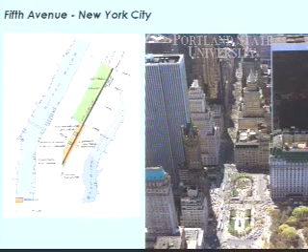Starting from the top, this sector of 5th Avenue in New York, from Central Park down to Union Square, runs through the heart of Manhattan's high-intensity retail district. One thing we found that stuck out strongly is that there's a merchants association that is incredibly powerful, with a say in everything that happens on that street, from light fixtures to furnishings to sweeping and maintenance.

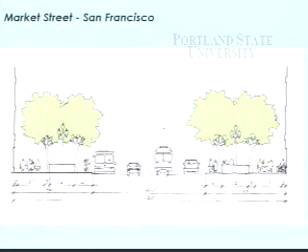San Francisco's Market Street has always been one of the more memorable streets, cutting right across the grid and ending at the Ferry Building. It's the most intensive transit street in San Francisco, with an incredible mix of modes on the surface and two layers of transit below the street. It's had its high points and low points over the last half century. We think of our 80-foot right-of-ways as reasonably good-sized, but this street is 120 feet wide, with a lot going on and incredibly wide sidewalks.

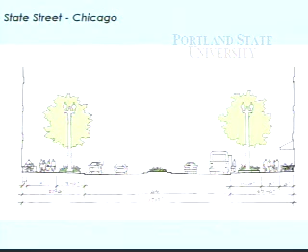State Street in Chicago was at one time called the greatest retail street in America. It had 9 department stores at one time, its own custom light fixtures, and has been the scene of great parades and homecomings throughout Chicago's history, right in the heart of the Loop. It really went downhill in the 1980s and 1990s, and was reinvented in the last 10 years, so it's on its way back. Again, an enormous scale street, although in Chicago, 120 feet of street width feels about right because the buildings are so tall, so there's a relationship there.

Nicollet Mall in Minneapolis was actually one of the first modern-era bus transit malls, done in the late 60s by the same team that designed our mall, Lawrence Halprin. It started with great fanfare, but within about 10 or 15 years there were all kinds of detailing and maintenance problems, and it got largely revamped in the mid-1980s.

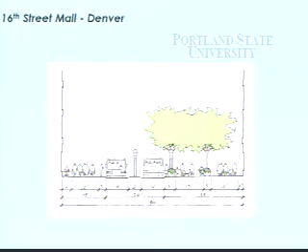Denver's 16th Street Mall was done in about 1980. This was Denver's prime retail street, the heart of the city, and they reconceived it as a transit and pedestrian corridor in the 1980s. This is probably the closest street out of this group built with the kind of craftsmanship that the Portland Mall has, with a lot of detail down to furnishings, paving, and custom lights. Denver's a little more in our scale - most of their right-of-ways are about 80 feet, but this is an unusual one. There are really no other vehicles besides these hybrid-powered shuttle vehicles that run up and down the length of it, so it's very pedestrian-oriented.

And then our mall, built in 1978 and then extended in 1994 all the way to Union Station.

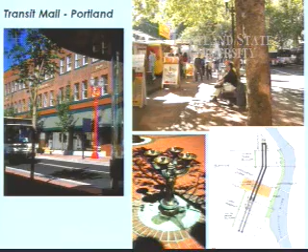Just briefly, the lessons learned out of this exercise - these are my boss Greg Baldwin's words, and I'll try to make them understandable. You want these great streets to reveal what's going on and the qualities of them, meaning the life of the city spills out onto these great streets. It's not behind blank walls and hidden away. The truly great streets need to have a level of finish and treatment that's of a higher quality than the other streets in the city, so it stands out in your memory as a very special place.

And the third point: require proper behavior of all activities. That would mean a simple thing like, would you put your service docks and loading docks right out on the front of a great street? Probably not. You would try to take care of that on another street frontage or below grade.

Accommodating all modes without compromise was a real challenge for us on the Portland Transit Mall—the great mixture of light rail, buses, bikes, autos, and pedestrians. You have to plan for those so that one doesn't dominate the other.

The biggest lesson, and maybe the biggest criticism of the Portland Mall, is that it was built at a time with a lot more federal funding than is available today, and it was in a way imposed on the city, without the kind of dialogue, interaction, support, and outreach to the businesses that front it. There were groups of businesses that never embraced the idea of the mall, and when there were problems, you'd often hear, 'well, it's TriMet Street, it's Portland Street, it's not my street.'

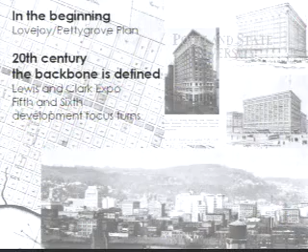In this earlier photograph, you can already see the highest buildings beginning to define 5th and 6th Avenue as the heart of our city. So they were the primary streets from the beginning.

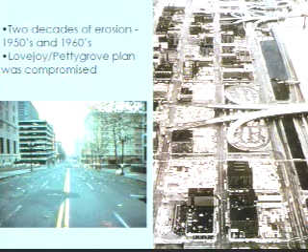But in the 50s, after the post-war flight to the suburbs with different commercial and retailing models—Lloyd Center on the east side and eventually Washington Square out west—we saw a decline of interest in downtown, and the removal of historic buildings as well as buildings that had lost care from their owners. The picture on the right shows the acres of parking that emerged downtown, compromising that original idea of the heart of the city through actions by other retail and commercial interests.

So in '72, under Neil Goldschmidt as mayor, with a whole host of other people getting involved, the downtown plan reestablished the principal characteristics for the city moving forward—reestablishing primary access north and south along 5th and 6th Avenue, with secondary access on Yamhill and Morrison Streets.

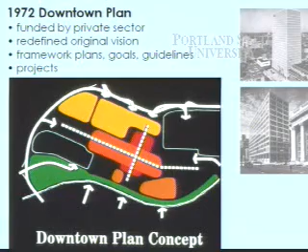And Brian will point out that right on the edge of that orange spot is also Market Street, which will come back into our conversation as we developed our design.

But the transit mall, from its early inception, really embodied quite a few of those important 'great street' characteristics. For Portland, establishing a civic design standard was paramount in terms of the level of finish and the kind of activity that would happen along the mall.

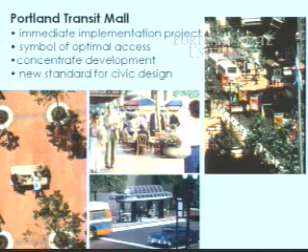By concentrating transit activities along 5th and 6th Avenue, it helped establish in people's minds the primacy of 5th and 6th as a place both for activity and transit to occur, but also for other development to occur—and you'll see that playing out in subsequent efforts.

When the Banfield Light Rail came in the 80s and reestablished the primacy of Morrison and Yamhill as cross-connecting streets, Pioneer Square as a development of place in the heart of downtown really helped manifest that. The development of the sidewalks, street furniture, and finishings along Morrison and Yamhill were very intentionally done, carrying through that palette of materials to reestablish not just literal interpretations, but the whole feeling through downtown.

One of the things you'll see as Bob describes these different transit corridor studies and projects over this 25 years is that the mall kept being revisited as a potential corridor to add rail transit of some kind. Each step of the way, there was an effort asking, should the mall be our next rail corridor? I think there was a pattern there that we knew eventually that was going to be the thing, but there were other projects to build before we got there.

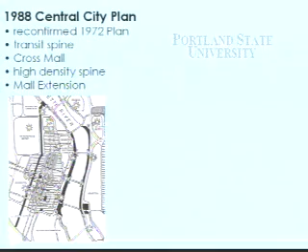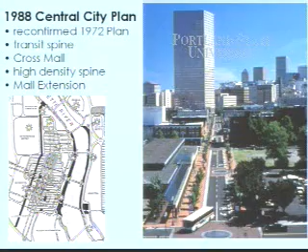This phrase about building community really became a kind of civic aspect of Portland in particular, the inclusion of a broader community in that dialogue, seeking out other voices and other ideas as that conversation was happening. It wasn't going to be just a guarded planning and design effort visited by a very few and then presented to the leadership and decision makers. So it's a much more populist kind of conversation.

As that continued through any other expansions of the mall, with the extension north out to Union Station, every move along the way was really scrutinized and talked about to a very high level, and the materials used and the places they were done weren't presupposed or prejudged at every step of the way. That's been talked about.

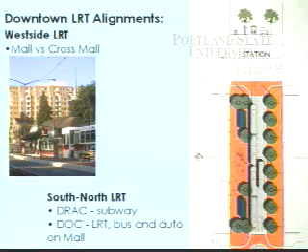In the further study that Brian was alluding to, when we got to the West Side project, bringing Gresham into downtown Portland and then taking Portland out to Washington County, that transference of the look and feel of the materials being used, even as it crossed into the Tualatin Valley and out to Washington County, is amazing to hear as we're involved in the design process.

People wanted it to have the quality of what the downtown mall's about. At the same time, they're saying, yeah, but I don't want it to look like Portland, I don't want Portland out in my area. So there's that betwixt and between of what are you doing that's specific to the place, but also allows a kind of individual district or character interpretation to come through. You'll see that again as we get further into this analysis.

The other point Brian's alluding to, in looking at this extension of transit into larger regional connectivity, the subway was studied quite a bit, wondering if we were to allow that higher speed and higher capacity movement through downtown, where would that go and how would it link into the surface, much like other cities have done around the country. But we kept coming back to the cost being extraordinary to build that, and the levels of people using that system -- it's a trade-off of how much you're paying for versus how much ridership you're really going to provide.

Without going into all the permutations that were looked at in the South-North study, it kept coming back to the fact that surface light rail transportation does allow flexibility and choice, and more fine-tuning and fine-grain positioning of where stops would go and how they'd interact with the neighborhood.

On Interstate Max, which kind of grew out of the ashes of when South North, as a $1 billion-plus regional transit initiative, did not pass, either in Vancouver, Washington, or in other parts of the city, it allowed that conversation of transit and growth and planning to still continue.

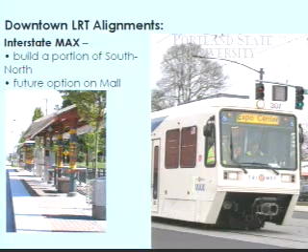Its relationship to the transit mall is we decided let's get our foot in the door on our eventual full north-south alignment, because ultimately this wants to go through the middle of downtown on another set of streets besides Morrison, Yamhill, and First, since we'll run out of capacity to run trains through our 200-foot block. So this was taking that tiptoe, or maybe even a bigger step, towards ultimately setting us up so we could put trains on the mall.

There were some parallel efforts going on around this time, all during the 90s, because South North was looming on the horizon as the big project that would come through and upgrade the mall with light rail service. There was maintenance needed on the mall, and the conversation became, well, we'll fix it when we do South North. That became a repetitive mantra, pushing out deferred maintenance farther and farther. At one point in 1994, we didn't know how long it would be before the next major transit project.

So PDOT, with the city, initiated an effort to just fix the mall right now, repairing it in its current design state. We went through an exhaustive study, documenting every broken brick, damaged bench, and chipped paint, and put together some estimates. But by the time that effort came to fruition, we were close enough to South North that everybody decided let's table it for a minute, because we'll come back and do that when we do the big rail project.

By the time 2000 came along and we weren't going to do South North, downtown leaders, the Association for Portland Progress, brought in the Project for Public Spaces, Fred Kent, and asked what could be done to bring things back. There were changes in the banking industry leaving vacant storefronts, and shifts in the retail industry. They wanted to bring back the vitality of the mall while the conversation about future transit corridors was going on. So those efforts were happening concurrently.

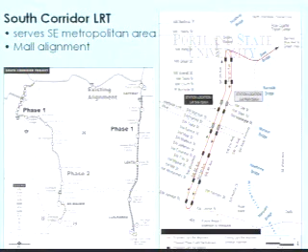There was a conscious effort here this time around by the agency leaders and planners that when we build this next corridor, we are going to get the downtown piece built. There's no way we can go off and build this and not add that transit capacity, nor can we defer all the work needed on the mall because of repairs. So the decision was made: we're going to at least get through most of downtown and finally get that north-south pair of tracks established and set up for the future.

You want to just talk about the process?

In this wide process of everybody coming to the table, TriMet is kind of the host that's providing, but everybody has to bring a covered dish or a salad or some other part of the meal.

It was a multi-agency effort, really an incredible amount of cooks in the kitchen. We had major citizens advisory committees made up of business leaders, citizens at large, and downtown residents. We conducted numerous workshops and open houses—unlike anything TriMet had done before—the outreach effort on this one was tremendous, to really let the community join and follow along and influence this design process.

One anecdotal point: when we originally started thinking about the mall transit project, it was just about the mall. We thought we'd fix some things and add light rail, doing it like we did with streetcar—this precise cutting in that wouldn't disturb anything, just laying it in. But through conversations with folks, we found the city had evolved, the citizenry had evolved and changed, and the expectations and needs had changed a lot from that earlier thinking about the project.

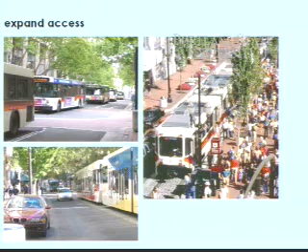And when the traffic engineers play that out, it doesn't all of a sudden open the floodgates to thousands and thousands of vehicle units, because it's regulated by cars that are stopping to turn, by the fact that it's a single lane, by the fact that transit has priority with the signals. There's a lot of other things that inherently calm that traffic down, but it was a major effort on their part to let us have some continuity there for looping around the block, for service deliveries and things like that.

And as it played out with our friends from the other modes, I think our bicycle advocates came in and said, fine, we like the continuity too. Let's make it a multimodal lane where they can ride freely on there. So that's kind of how that went.

The mall, though, again, as an act of community participation, of thinking about the materials and the actions that would happen along these great streets, it kind of elevated, I think, Portlanders' understanding and expectations for what urban design should do. Not what it could do, but what it really should do. And as folks have been involved with the design process, it's quite frankly pushed us to try and do more in looking at what this project was going to be about.

And so some of the elements that were in the original project, the benches, the brick crosswalks with the granite circles, we understood that those aren't just sort of precious artifacts that are kept around for historic thought. They're actually a part of how we understand the public space that we're moving through and how we appreciate what's going on in front of us.

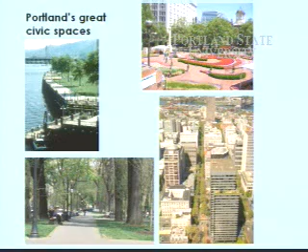So as a city is emerging and growing in the public spaces that we all share and use, Portlanders use them. They expect and demand a lot of activity, be it the Waterfront Park or Pioneer Courthouse Square, or even up in the park blocks. And so this recognition that the mall, yes, it's highly valued and highly participated with, but it's also going to be, it has to have a sense of refinement, it has to have a sense of quality that can withstand all that hard love and attention that it's going to get.

It's not precious. So we're about midway in concept design, and at this point, the city brought on a new director of urban design, Arun Jain. I think you might have met him. Really talented guy coming to us from the Bay Area, who had the benefit of coming into Portland and looking at it fresh and didn't have all the 30 years of baggage that all the rest of us have.

He and his associates embarked on about a 6-month study of the mall, looking at it in the bigger context of the central city and where things are going. When the mall was done, we didn't have thousands of people living in the Pearl District or the West Side, so the nature of downtown was really evolving into a bigger downtown. He advocated for taking a look at it in that bigger context, and this is a quick summary of some of their findings.

The level of activity up and down the mall from one end to another really varies. There are parts that are dead, parts that are very lively, parts incredibly developed to high density, and parts with one-story buildings that will probably have much larger buildings at some time. As downtown has grown, there are a lot of important connections from the mall to the east and west that maybe weren't there before.

If you look at downtown, there are subtle, and maybe not so subtle, shifts in character as you move through. For instance, the University District is an emerging thing on the mall—more established over on the park blocks, but with new buildings reaching east, it's beginning to establish its presence here. There's a very definite character district around City Hall, the government buildings, and the Chapman-Lownsdale block. There's the retail core in and around Pioneer Square, and a banking, financial, and hotel area at the north end of the central area.

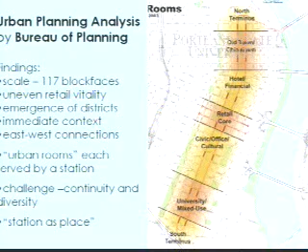So we began to look at where you would put stations within each of these districts and what the potential is. Obviously, in the middle of downtown it's pretty well built out—there aren't a lot of open opportunities. But up at the north end, with the post office and the UNR blocks, there's potential for significant development around stations there. So this began to give us a framework.

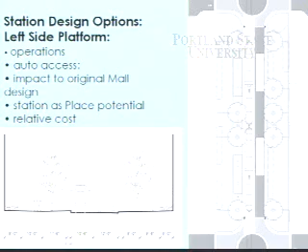If you're running the track in the middle of the street so buses can still use the right-hand lane, the curb is already out there on those wide sidewalks, so that became a natural choice. We're still thinking we've got to afford this project and can't rebuild the street from wall to wall, so that became an obvious choice. But it doesn't allow auto continuity or bike continuity through there, so it had that drawback. But if you did that, what would it look like? Here's the middle of the mall, and here's where those wide sidewalk blocks would occur.

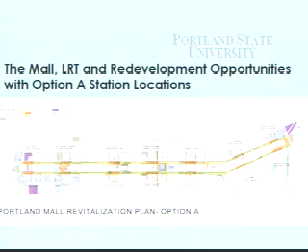At the north end and the south end, the stations stay consistent between the alternatives.

We went through quite a bit of struggle, with many different configurations considered, wide options, driving on the sidewalk, about everything imaginable.

Our friends at TriMet started looking at the idea of treating train like a bus, running it down the center of the street. When it comes to a station about every 4 to 5 blocks, it gently weaves over, unloads, and weaves back. That sounded good, but we knew this would be an amazing ballet between buses and trains switching back and forth.

So we spent about the next year with the best experts in those engineering and planning disciplines, testing this idea out, modeling it in computers, working on signal timing, and addressing all the safety concerns to make sure this idea could really work. The outcome was that we finally came to a level of confidence that it could work. No one in the country had done this before, but we felt we were on good ground.

It does mean an adjustment in the volume of buses that will use the street. Part of that is driven by the fact that some bus lines coming downtown will have their service taken over by trains.

The other factor is we're figuring out ways to shift some of our bus volumes over to streets like Columbia and Jefferson. You guys notice how many bus lines have shifted to Columbia and Jefferson now? So there's some of that going on, but it's also about looking at a greater map of downtown, light rail on this alignment and our existing alignment, where buses are coming in, and where streetcar is. We're trying to get transit to cover a bigger area and give people more options for getting around, both on transit and on foot.

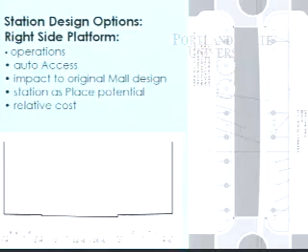So here's how that played out, and I think this is where Arun's wisdom came into play. If we went to this right side option, it all of a sudden frees up the flexibility to put the stations anywhere we want, because you can pull over the train. It has nothing to do with where the curbs or auto lanes are. That allowed us to shift this station, which in the previous scheme was one block to the south.

Now it's right to the heart of the city, right at Pioneer Square, allowing us to create an amazing transit nexus there, where people coming into the city from east, west, north, or south who want to go in a different direction can transfer right across an intersection.

It also allowed us to shift the station at Washington and Stark two blocks north to Unico, which is the state's largest office complex, the highest density, the biggest building. There's a large number of people in this area, plus the remaining financial district around here.

The more we thought about it, the more it made sense that Unico is a hub for this whole neighborhood, with a whole retail concourse on the ground floor. Meanwhile, our Couch, Davis, and Greyhound North Terminus Union Station stations stay the same.

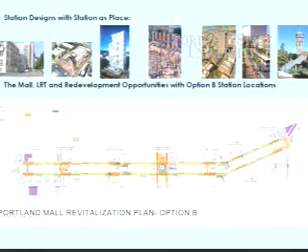Part of the investigation with the Bureau of Planning was also working with PDC, the Development Commission, doing some of their legwork to understand what were the things about development that the transit project would need to respond to.

Part of it was understanding that the project itself had to become better maintained, had to do things differently than before. Out of that grew this attitude that maybe we should have a project that operates more like how the private sector would take care of things. What grew out of this was something called a mall management team.

This is a sort of public-private consortium, like was explained at Nicollet Mall in Minneapolis, that would make a commitment about the maintenance and activities of the mall on 5th and 6th Avenue. But there's other things we have to do too, explaining what's going on, programming some activities, and finding a way to provide a higher level of maintenance, security, and cleanliness than any of us could achieve on the public side alone.

This public-private partnership grew out of a desire for both agencies to perform at a higher level and leverage the limited funds we can bring to the conversation, while also providing certainty that, with their participation, this hybrid arrangement would help everyone perform at a level that truly matters to them as property owners and retail providers.

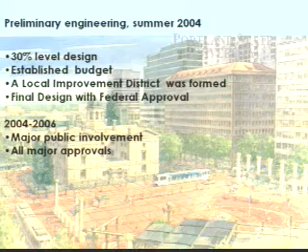You don't have that kind of openness from private enterprise to participate in a public project like this. But this was part of this evolution of the project, and so we went to the FTA, and we could really talk about how we're going to bring this project in on budget, on schedule. One of the huge things we could talk about with a higher level of certainty was the risks of doing this project in such a public space. This participation lowered the fear and concern that had happened in so many other projects across the country—in Boston, Chicago, Los Angeles, New York, Denver. There are a lot of problems that can happen when there's not that higher level of coordination between the public and private side.

So, just so you guys can get out of here before 5 o'clock, we're going to fast forward through a few of those middle phases and jump into final design.

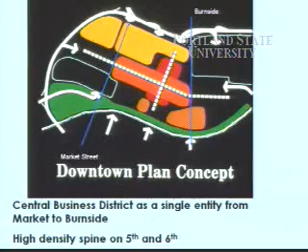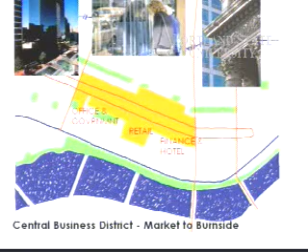Interestingly enough, you saw this diagram before. When we went back and looked at some of the historic documents of the original '72 plan, which was really a seminal plan for Portland that turned the ship in a different direction, a subtlety lost on us before is that this plan envisioned a unified central core area running from Burnside actually to Market Street. But interestingly, when the project was built in 1978, for whatever reasons, it only went to Madison. A couple years later, Pac West was built, and that owner decided to install the improvements to match them all on his own nickel. But it officially ended at Madison.

Our business leaders and our Citizens Advisory Urban Design Committee said, when you really look at the nature of downtown—Madison and Jefferson, Wells Fargo Tower, the 1515 building, Southwest Fifth Avenue—it's really a continuation of that office core. It really feels like that should have been included in the original carry of the brick, the lights, the shelters, and those Central Mall themed improvements.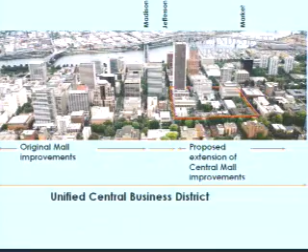So that was one of the first things we jumped on: that character of streetscape improvements ought to be extended all the way to Market, which coincidentally is the boundary for the University District. You look on the street signs there, and that's the beginning of the University District. So it made it a natural transition right there. In diagram, extended down to Market Street, that's what it would look like.

Then at this point, there was a pretty interesting thing we did. We decided to really open up and pull in a wider spectrum of great minds in the design and planning community. So we started this—about a 6-month or 8-month effort—called the Station Area Planning Process, where we contracted with outside architects, designers, and planners to help us drill down more into this idea of station as place and what the different characters should be.

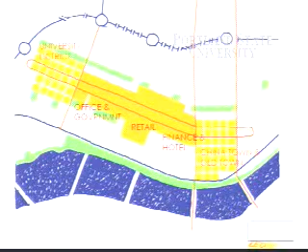We had SERA and Murase Associates take on the Old Town stations plus Union Station. Walker Macy, who was the original landscape architects for Pioneer Square, advised us on the station around Pioneer Square. And Thomas Hacker Associates—the designers of the building we're in—took on the whole South Mall University District area. That turned out to be an incredible thing, to open it up to what does the mall look like to other sets of eyes?

And it was really a creative, energizing process. I'll get into that more as we go.

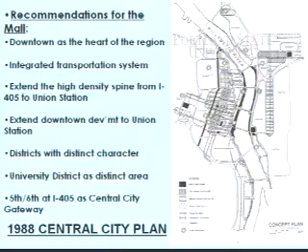At this time, we were signed up to go through the Portland Design Commission, the official body that reviews private sector development. If you're going to build in downtown Portland, you eventually need approval from the Design Commission before building permits. As a courtesy, throughout Portland's history, whenever there's a non-standard, elevated, enhanced improvement in the street—even though this is a public right-of-way project, not a private property project—it's taken through the Design Commission so they can comment, particularly on a project like the mall, which is more than a street. It's a civic space.

As we got back into the 1988 Central City Plan, which is still the standing plan on the books until they update it, there are a number of recommendations that pertain to the mall. They called for extending the Union Station area down to 405, recognizing the distinct areas, forming a gateway at 405. So we began to look back over some of these plans.

This is some quotes from the Design Commission. They weighed in very strongly on the side of continuity. They felt like the power of the Portland Mall—when you're an outside visitor and you get to that thing, as you look at it, it's unmistakable. It doesn't look like Broadway, it doesn't look like 4th or 3rd. It's a memorable street because of its physical character.

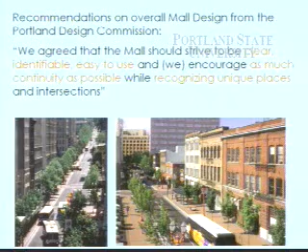So we then went through the Central City Design Guidelines—I guess you guys are familiar with them. It's a pretty large document now, with a series of guidelines that individually talk about various design goals. One interesting thing as you dig into those is you realize the Portland Mall is sort of embedded in these things. A lot of these guidelines actually use the Portland Mall as an example of what they're talking about, as something to aspire to.

Things like Portland themes—the rose, the heron, water features, the rain, the mountains. You remember the symbols on the side of the bus shelters with those kinds of graphics? That was very much driven by this idea, of celebrating that idea.

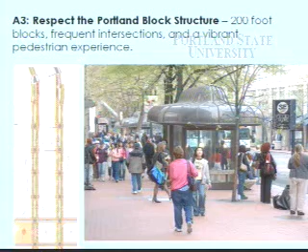The guidelines thoroughly recognize our unique small blocks, which creates a lot of intersections, but also gets a lot of light and air into the city. And it creates a lot of pedestrian vitality because there's people coming from so many different directions.

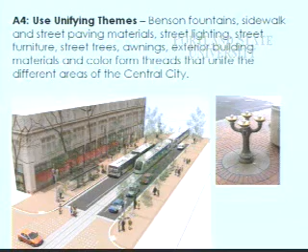This is probably the single biggest one that the Design Commission kept hammering the table on—use unifying themes. That's one of the strengths of the Portland Mall. It plays out, and you'll see later, when we get into how we felt strongly we needed to hang on to the brick in the intersections, even though it had been such a definite maintenance problem.

They talk about reinforcing the pedestrian system. And again, what better example of the pedestrian system is there than 5th and 6th Avenue, with the wide sidewalks, the amenities, and the trees?

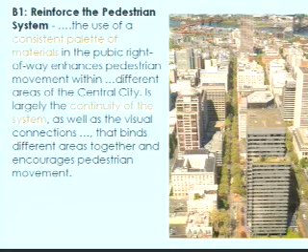Even down to the design of the sidewalk, the guidelines now very formally recognize the traditional zones of a sidewalk: the furnishing zone, the through zone, the transit boarding zone. Again, the mall kind of embodies that, and these guidelines really refer back to the precedent that the mall set.

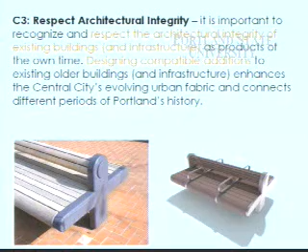And respecting architectural integrity—that's written more for historic buildings, but it can also be interpreted to think about those iconic elements that were in the original mall design that still have a lot of validity, and how there's a way we can hang on to those things and refresh and renew them.

And then building active intersections. For us, designing the right-of-way, that means recognizing we don't put a bunch of stuff there that really compromises how people can use the corners and intersections. That's where everybody gathers before they cross the street.

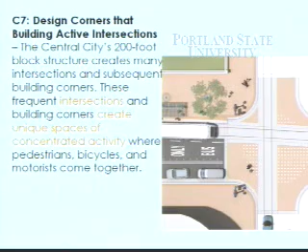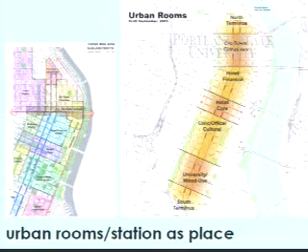So this is just a little bit of background reference, to remind you that when we're designing a project like this, there's a lot of public policy considerations that come into play. So here you have this strong idea of urban rooms and station as place, and yet this directive to be aware of continuity. So how do you reconcile these two forces?

I think the answer is you do both. There are ways to have threads of continuity that let you know wherever you are on the mall, that you're on the mall—but in Arun's words, they also let you know where you are in the mall, by certain things being distinct.

So this is how that kind of plays out. There's this powerful continuity in the central area. In the South Mall area, I think what Thomas Hacker advocated for is that the east-west streets in this neighborhood are almost as important as the north-south streets, 5th and 6th, because the university is growing to the east, and streets like Montgomery and College are clearly identified as corridors. They're going to link from down to 4th Avenue through this area all the way back up to the core campus on the park blocks.

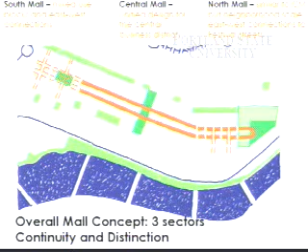And something similar in the North Mall with the development of the festival streets on Davis and Flanders, the idea that those could be embraced by the mall and eventually even work in the future to extend those linkages all the way over to the North Park blocks.

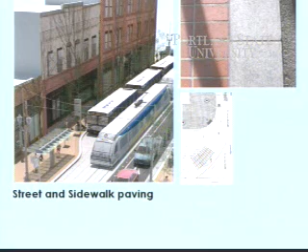So starting from the big picture, there's a number of obvious elements that are these threads I talk about that really run from one end of the project to the other. There's going to be brick pavement in one form or another, one color or another, that really ties the whole area together. There are a number of fixtures that go along with that.

The traditional Portland light fixture was successfully adapted back in the 80s with a shaft coming out the top to also be an overhead electrification support. You've seen this, I'm sure, on Morrison Yamhill.

Well, the added complexity here in the mall now with the introduction of trains and buses is our safety folks said we have to have overhead signals. We're not going to be able to rely just on the little side-mounted traffic signals, because you have places where a train driver, if he's coming up to a block and there's a large bus here and a garbage truck there, he can't see those side signals out of the front of the train. And if somebody steps out from behind a vehicle, there's no way he could get his train stopped.

So what we did is we went back to the drawing board with our engineers and we said, okay, there's going to be overhead wires there for the electrification system. Could we beef them up and hang the traffic signals on them? So after quite a bit of head bashing over a few months, we decided we could do that. And it wasn't the conventional way of doing it, but in the interest of simplifying and keeping the number of poles and hardware minimized, we were asking these poles to do not one thing, but three things.

And out of that grew this idea of a family of poles, starting with the very biggest ones and then working your way down to just the smallest. There'll still be side-mounted poles with pedestrian fixtures on them, but we wanted the whole system to look like a related family.

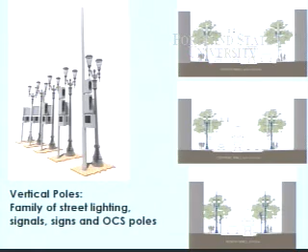Probably one of the biggest two things that had the most scrutiny and conversation, and at times some really heated debates, were the iconic mall shelters, which were built back in the 70s. Everybody began to identify the downtown area by the shelters, understood that to be the architectural element. What we also began to understand, though, in this talk about the changing nature of downtown and what had been evolving around the mall since the development occurred, was that the shelter, like a little house where you go in for protection from the elements and find transit information, had also become a place for other people to go into and do all sorts of things.

There could be bathrooms, there could be, well, anyway, we won't go into all the detail of it, but even a hotel. We got that sort of reality check about what was really their contribution on the streetscape. And the new concept of a transparent shelter, both for visual connectivity, wasn't just about the safety and sense of security for a transit patron. It was also for the transit person to be part of what was going on in that wider streetscape, with the Association for Public Process and the Project for Public Spaces telling us that the real streetscape was from building face to building face, and that even inside the building, the activities going on there informed what was happening out into the common place.

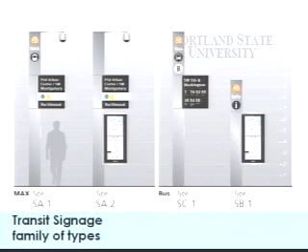We were talking this morning about how in the downtown area, in the Central Mall, the trees that have developed over 30 years with canopies quite a ways up in the sky have a whole different feeling than the North Mall with a different species and configuration of the streetscape and building sizes, or the South Mall, where there's a variety of different species that, because of their placement, don't have that kind of rhythm and rigor seen elsewhere. That's part of the element of distinction that happens through the landscape architecture, not just the built form.

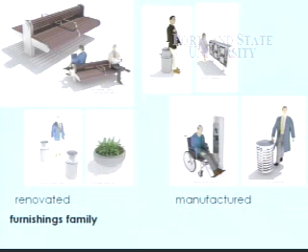We're even teasing into the notion of whether it's possible to collect all the newspapers and other free magazines into a ganged rack, freeing up more streetscape area while still letting people know where to find those materials. So all the way through, we're looking at a fresh eyes approach to the amenities and furnishings we'd have along, bike racks, leaning rails.

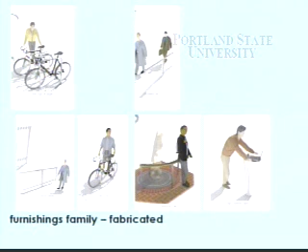The piece in the lower right picture we call a tad pad, after the artist who came up with the idea. It's about understanding that when you're on the street doing a variety of things, having a place to put your cup of coffee, your computer, or sit down and do a crossword puzzle encourages that life on the street to occur throughout. So we're finding ways to let that sprinkle through, not just at the transit stop, but on both sides of the street throughout the whole block face.

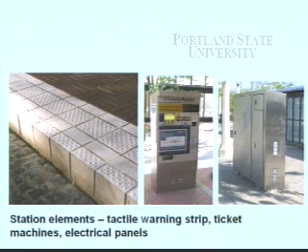In the Central Mall, I'm going to go by sector now. The Central Mall really embodies all those things that you just saw, runs them through there, and probably the biggest thing that we had a year and a half head-banging debate about was what to do about the intersections.

When you go back and read those original design reports by the original architects, they were very strong about those intersections being the continuity of the pedestrian system. It's really a different street when you think about brick sidewalk, asphalt intersection, brick sidewalk. It doesn't quite have that same continuity of that ribbon of red brick. Over the last 28 years, it's given that message to motorists that you're entering a pedestrian zone when you go through those intersections.

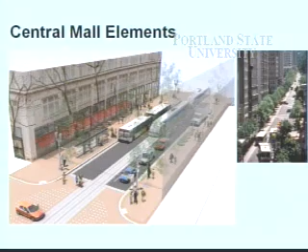That said, from the other side, from the PDOT side, these have been the biggest maintenance nightmare of anything in their system. These intersections were built with what we call rigid set mortar set brick, which is inherently a problem with buses because of their loads when full of people, so it was the first thing they wanted to get rid of. We had a major coming together, and we actually went to England and got an internationally recognized paving expert who deals with flexible set pavements on sands and aggregates, which is done all over Europe. We brought him over here through a series of meetings and workshops and developed a system we now feel relatively good will work well.

We're in the final stages of refining that. We were also interested in the role the circle originally played there. It kind of defined where you're supposed to cross the street, gave a cue that the automobile continuity drove through there, but you're still crossing brick crosswalks. In this new technical system, you don't want that—that's one of the failures of the old malls: soft asphalt, thin granite, rigid set brick, thin granite, so many different systems coming together, and when the buses roll over that, they pound it with their heavy rear axles.

So with our paving expert, what he really advocated is you need to pick a system from one end of the intersection and run it all the way through. So if you want to express a circle, you need to do it out of the same material we're building the rest of the intersection out of. We experimented with a variety of different pattern makings, and this is the latest one that we think is going to be the winner because it doesn't interrupt our basic pattern.

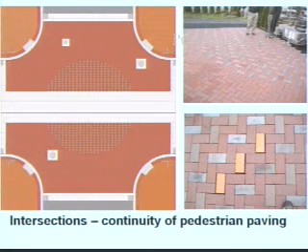We actually had a brick supplier here in town mock up a quarter of an intersection so we could look at it at their yard and see how visible the circle was, and I think we've now got it down to something we feel pretty good about.

Questions have come up from a lot of folks about the art program. In the original mall, art was a central component. That's going to continue—we're going to take all the pieces off, clean them up, and restore them to their pristine condition. Then we'll look at where they should be positioned, how we can arrange them so people could perhaps walk around the art and understand it a little better, so it's not just plopped willy-nilly. Plus, we're going to add to that collection with new pieces to extend the time period from the 70s up to more current day.

We're also going to, in North Mall and Central Mall, have an artist develop elements to create more of a characterization for the area that's distinctive with the neighborhood—again, that station-is-place concept with elements of distinction. So the art program will be part of that. I'm aware we're probably running long here, so let me try to pick this up a little bit.

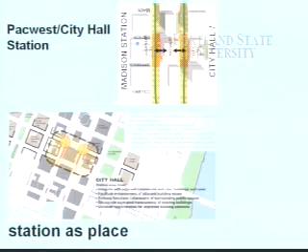Just individually around these stations, if I can hit them. At City Hall, one of the things we discovered in looking at this, we're advocating for distinction and continuity. When you look closely at the area around Pac West and City Hall, there's about a 5 or 6 block area where the buildings are actually pushed back from the edge of the right-of-way and have gardens and front lawns.

That in and of itself gives this a distinct area, and we're going to be locating our station platforms on either side of Pac West, which has one of the nicer ground floor retail environments of many of the larger office buildings in town. So it's got kind of a character, and our main task here is not to wreck what's already there, to try to tread lightly with our improvements.

Just an example, at the University Club, the front plantings, the heritage tree - we actually heard from the city's Bureau of Buildings. They didn't want us to do anything to the front of City Hall because they just recently restored it back to its historically accurate concrete sidewalks, motor court, restored the balustrade. They just said, no bricks, don't touch us if you can help it, and that's fine. That's part of the distinction.

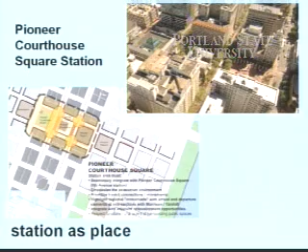Pioneer Square, the moves here - again, it's already a great distinctive place, so we tread as lightly as we can, but there's been a long-held desire. If you look back when the mall first went in, the courthouse was very prominent - this is before the square was even built, the Meier & Frank Garage was here. But as the square was built and the trees grew up, over about 30 years, the courthouse just disappeared because it was behind this kind of monolithic treatment that the mall has on every block with two shelters and six trees.

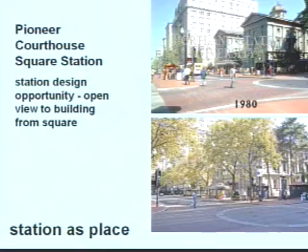So there's been a long-held desire, and Doug Macy was an advocate for this: could we remove a few trees now that have gotten so large and actually open that view up? This is a concept sketch - here's the courthouse, here's the center of the square with the formal center line running back there. We've actually removed a few trees right in the center and pushed the shelter and the other furnishings out to the edge.

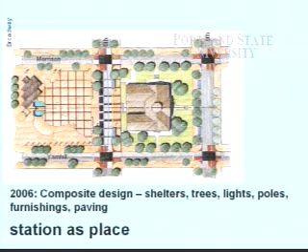You see it a lot in formal government buildings and in Europe, where there'll be a dynamic palace building at the foreground or right at the end of a plaza. So that's what this is all about - to try to have that courthouse finally have that relationship to the square. There's some talk about even enhancing the uplighting of buildings around there to really play up the uniqueness of that two-block area.

Am I talking about this one? Unico, I think we mentioned - this is you, actually.

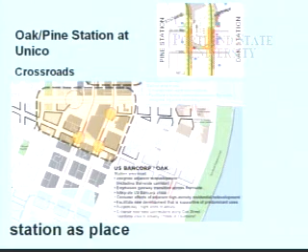So we've talked with the building owners and said, would you want to partner in some of the fixing up that you're planning on doing with the notion of having the transit stop there, and again having more of an integrated idea.

We're going to really look to enhance the view angles for the art that's around there, to clean up and replace the sidewalks and the bricks throughout. To look at doing perhaps a lighting intervention with the streetscapes through there, to amp up that sense of brightness and illumination as a prelude for crossing over Burnside too.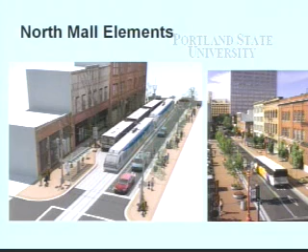So the art treatments that we're going to go through there are actually going to occur at the platforms at Couch and Davis, to have that quality and level that's more about the variety of things happening in Old Town and Chinatown throughout the mall, rather than the civic grandeur of Central Mall. It's really fortuitous that one of our platforms ends up located, in my opinion, on the best block in the North Mall.

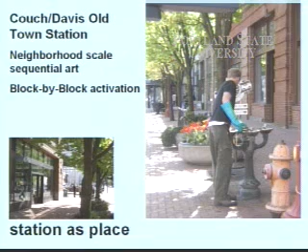It's where Three Lions Bakery and all the clubs and art and clothing stores are. So it's going to take an already really great active block and animate it further by having the station. You'll be able to sit out there and have a coffee, walk ten steps, and step on a train and go to your next destination.

Union Station, as that sort of foyer to the city, there's a lot of other ideas percolating about what should happen out there. In the planning we're having with Morossi and SCRA, how can we begin to set up some of that conversation of connectivity, of urban design treatments stretching across Irving Street, both to Union Station and also towards the Pearl District, and what would be some important connecting points with Glisan and Hoyt.

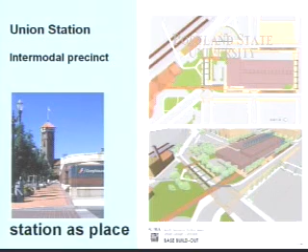As you can see here, there's the Greyhound Station, which is kind of losing its presence and level of service, but it might be poised for more redevelopment in the near-term future. The blocks just to the west, the U and R blocks, are identified by PDC for redevelopment. Is that going to happen tomorrow? Probably not, but will it be happening eventually? Absolutely. So we want to be clear about what we were doing on the transit project, setting up that importance of Irving Street as that north gateway for us.

Here's Thomas Hacker Associates drawings, and I think they saw Market Street as that cutoff point where the Central Mall character would stop, and this is really the University district. You can see in this sketch from two years ago, they're already beginning to suggest Montgomery and College as potential green streets or pedestrian-oriented streets.

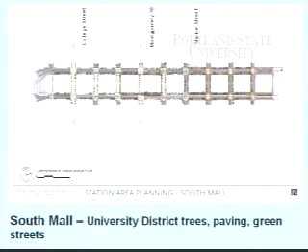And they went on to develop some really interesting sustainable stuff. We all got inspired by this shot from Michigan Avenue in Chicago, which is a great retail street, showing this idea of introducing lush planting in a high-density retail environment. And we started to think about it.

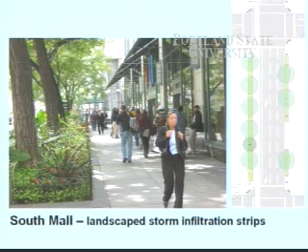What if it didn't have this lip here and the sidewalk drainage could actually drain into the landscape? You're getting two for one — you're getting the beauty of the green area, but you're also taking some of the stormwater volume out of the system. So we started playing that out further, and we knew there were going to be places where we can't have soft landscaping, where we're getting on and off of buses and trains.

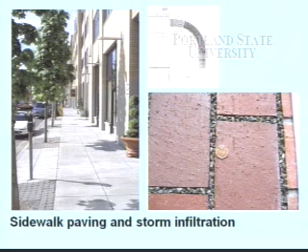But we started to look into what's been done in Europe, and they've developed some paving systems there that we're going to carry forward, where we actually set the pavers on little plastic spacers on an aggregate bed, spread them apart, and fill or seal the joints with a binder, but allow the water to run into this pavement. You can walk over it, but you still get the stormwater retention and infiltration you're getting with soft landscaping. I think that's something they advocated for very strongly.

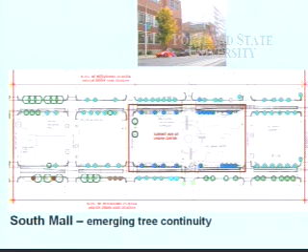In the tree species, what we've developed is we're going to let there be this diversity of tree species for the immediate next 20 to 30 years, but as some of these maples and things begin to reach the end of their life, or are taken out by a project, we have a new species we can begin to infill over time. Then slowly but surely, maybe 50 years from now, you begin to have more of that powerful continuity of species that you have in the Central Mall with the plane trees. It begins to give this area a really distinctive look.

We're also going to address something you don't realize — or at least I didn't, because I just assumed it — this part of the city doesn't have the twin ornamental lighting. I just thought it was everywhere. I drove around one night and realized, no, it's not everywhere. There's still wooden poles, highway cobra head lights, overhead wiring and stuff, because a lot of the high-density development hasn't happened here. This project is going to bring the ornamental lighting all the way to the southern terminus.

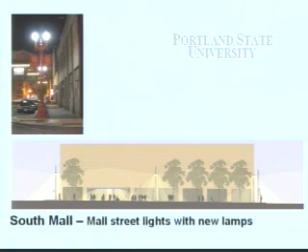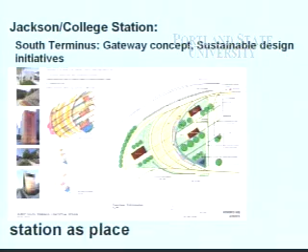Speaking of the southern terminus, Jackson College Station will be the turnaround spot for trains, located between College and Jackson — the first stop on 6th as you head north and the last stop on 5th as you're heading south. But anticipating that movement to extend the system south in the future, because of its primacy and being seen by everybody — usually this is a back-of-house place where we put a bunch of poles and the trains stop, kind of considered a back door where you don't do much.

But this spot is going to be seen by everybody in West Hills, OHSU. So it's visually very, very important as a focal point.

And certainly as we extend to the south, we anticipate this would be kind of a gateway as you come into the downtown area. So Hennebery Eddy architects have been brought in to look at arranging that operational equipment, but doing it in a more artistic way, maybe having some larger art element to really signal that, bring together all our sustainability initiatives with stormwater filtration, alternative energy, PV panels, wind turbines generating power, all kind of happening at this little spot on the south side, and actually be a place where our operators take a break.

It'll be in a wonderfully visual, accessible spot right on the seam on Jackson Street, where development to the north would happen in partnership with PSU. We know that PSU is very intrigued in having more sustainability initiatives in that kind of development, so we're hopefully setting up some win-win opportunities for both of us.

And I think finally the urban center, which is already great. Do you guys realize—I guess you probably do—the trackway cutting across the block like that was originally planned for the south-north project, and light rail was going to go down Harrison Street. Well, when that vote died and never came through, right about that same time, Streetcar came through and said...

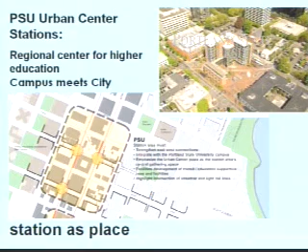And so now, with the addition of light rail now parallel on 5th and 6th, plus all the bus service that's going to be in and around here, this is really going to be probably the biggest transit hub in the region in terms of riders and the mix of modes.

So one of the things going on, as you know, there's going to be a new student rec center right across the other side of Montgomery. This is an incredible opportunity, knowing that transit is coming, to break away from the traditional—here's a building, here's a little shelter out in the sidewalk.

There's a chance here to really think about ground floor retail activity, weather protection in an integrated way, so that the architecture of the station and the architecture of the rec center all come together into one integrated whole. So it's a great thing to look forward to.

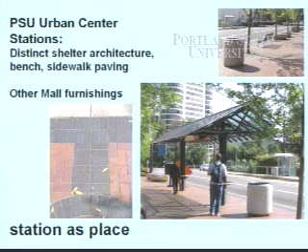And as a distinctive place, we already made the choice up here to change to a slightly different brick color, a slightly different shelter than we did back in 2001. So it has some distinguishing qualities already.

Finally, to wrap this up—it's not been just about the physical characteristics, it's also been about the human organizations. The mall management now is a formalized 501c3 nonprofit, has a board, and will be the entity that manages the mall's safety, security, cleaning, and programming of activities and events.

It allows a hybrid of public dollars to come in with private intervention too. They'll be the ones carrying on and following up with the mall activities as it goes into the future. They'll be the ones that, when the phone call comes—hey, a car just ran into a bus shelter—get out there and fix it right away rather than waiting for TriMet to get to its response.

But also the ones that have probably the best opportunity for talking to their own businesses and retail folks, changing that little window you look at retail into more of a gregarious involvement with what's going on in the streetscape, having those outside and inside barriers open up more and being more a part of the active life of the street.

So here we are. We're under construction now, as you guys have figured out by now, with all the buses moving and the jackhammers and the piles of gravel everywhere. And it's going to ramp up incredibly here in the next 2 months. By the middle of March, what we call our first civil reach starts up, and they're already beginning to store rail up here underneath the freeway. So you're going to see a lot of hubbub.

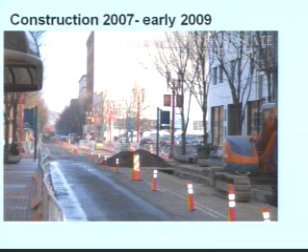We do have a great team in place, though, to keep the dust and the commotion down, and there's signage up so you can find your way to the businesses still operating on the mall. But it's going to be an exciting time, because in a matter of 2.5 years, hopefully, this street is going to be like this. Your transit service will be back on the mall and expanded. You'll be able to ride from PSU to Clackamas Center and not even get off your train. So we're really looking forward to it.